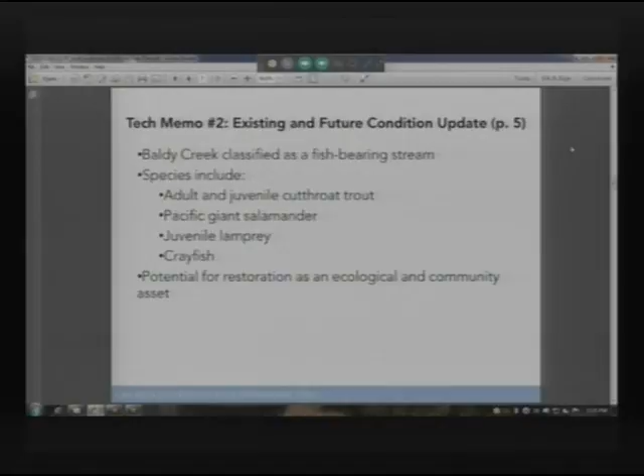Let's click forward to Tech Memo 2. The only change we made based on our conversations early in the fall was to add information about Baldy Creek, which came from a councilor or planning commissioner — folks were really surprised Baldy Creek is such an asset. Lila Bradley helped us with information from the ODOT survey during the 101 construction project. Recapping from the memo, Baldy Creek is classified as a fish-bearing stream by Oregon Department of Fish and Wildlife. Species include adult and juvenile cutthroat trout, Pacific giant salamander, juvenile lamprey, and crayfish. So as surprising as it is for an urban stream right next to the highway, it does seem viable for ecological restoration, so it can be both a community and an ecological asset. That's the one change we made on page 5 of technical memorandum number 2.

Did anyone else see anything in Tech Memo 2? Folks have busy lives, so I'm not sure you poured over it again. We covered it in a previous meeting, but we're supposed to finalize and put those memos to bed as we continue. So any other changes at all?

If not, then I hope — Lawrence, have you been able to join us back? Sometimes the webcam doesn't work just because of connectivity between here and Berlin, but he is on the phone with us.

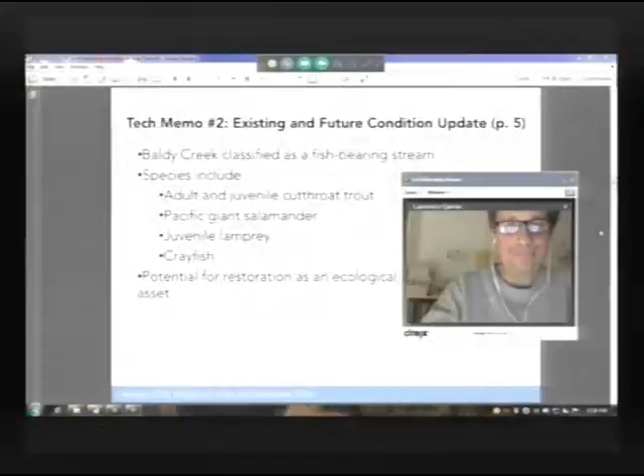Lawrence, at this time, if there are no other questions or comments from PAC members about the purpose of today, I would ask you to dive into a brief overview of the diagrams. So PAC members, any questions before we transition to Lawrence? Or Richard, anything else to add from what you've heard, Deborah, and what you covered?

All right, thanks. I should say thank you to the project management team members of the city, as well as Allison, Lila, and Richard, for commenting on the earlier versions. We've had significant discussions since their comments, and it's really helped us refine some of our thinking about the district. We'll touch on some of that today. I'll turn it over to Lawrence then.

Good afternoon, everyone. I wish I could be there with you in person, but this is a pretty exceptional little piece of technology that allows us to virtually be there. And of course, I've been coming to Lincoln City for many, many years and know it so well that it's fun to be here.

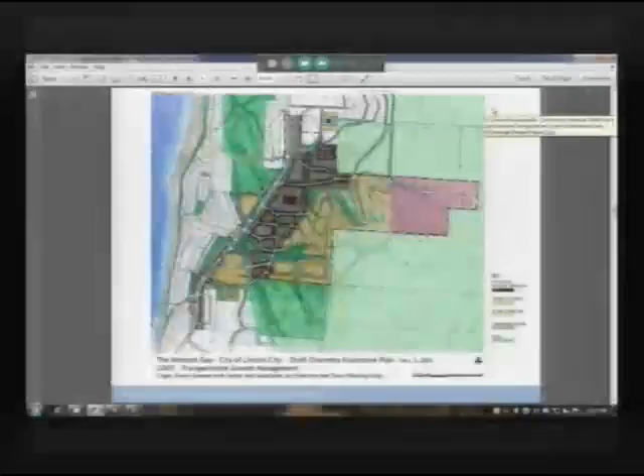I think we'll transition first to the next slide, the master plan. This is the plan we developed during the charrette, as Tricia was saying a couple months back, and it was worked on further afterwards, but for the most part all the concepts and implementation of this plan were established right there in the Nelscott Strip, with people coming in day and night, us working day and night, preparing this plan, walking the site, going up into the hills, up and down the roads, up and down the highway. Sometimes neighbors would come in and say, come on out, we want to show you what our area looks like, and we would tour it with them. So there's a lot of on-the-ground local knowledge filtered into this plan.

Let's start by orienting you all to the plan. Let's first point out, with the arrow, the Nelscott Strip — right down by 32nd Street. The Nelscott Strip is really the heart of this whole neighborhood, one of the pearls, one of the great historic places of all of Lincoln City. And with the recent renovations to the street and realignment of 32nd into a four-way intersection — what we call in town planning terms, Main and Main.

Retailers think of Main and Main as really the center of a village, the center of a town. That realignment really has great potential for strengthening not only circulation in the area, but strengthening the retail on the strip.

Also, the clear definition of the slip lane that was done by ODOT is excellent work at maintaining that little strip of parking in front of their shops. Parking right in front of the front door of a shop, even if it's just one little strip like this, or on-street parking, is the hallmark of what makes a great Main Street.

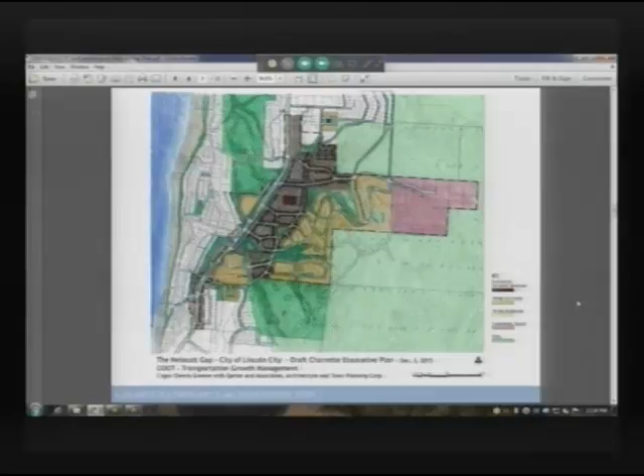I think now we can move to the next map and talk a little bit about the zones. You'll see in this map, before we move on, a couple of different zones we were indicating - but this goes further into that definition of several zones. In fact, on the right-hand side you can see 1, 2, 3, 4, 5 main zones, in addition to open space and parklands.

First of all, let's go back to Nelscott. You'll see that there is a pinkish red color, indicating essentially the existing commercial zoning throughout that Nelscott portion of the study area. You'll also see a similar color to the north of the study area indicating the existing retail, commercial zoning. In between that, you're seeing a red, but with a black cross-hatching.

We do not intend all of that by any means to be a commercial zone. But it is a higher intensity zone, one that would be the types of buildings that are flexible in use, as Deborah was mentioning. Flexible in that they can have some retail in the base of them, but also at the top of them they could be offices or residential. That's called vertical mixed use.

So we're calling it the vertical and horizontal mixed use zone. The idea of mixing uses, instead of segregating retail, commercial areas from separate housing and residential areas, is that it creates a much more lively, engaging community when right down the street or next door you might have a shop, a cafe, a restaurant. So we have to define clearly a more focused, limited area as to where retail would be focused, and perhaps it will gravitate somewhere closer to 32nd Street, especially if that becomes a signalized intersection, as has been indicated by ODOT.

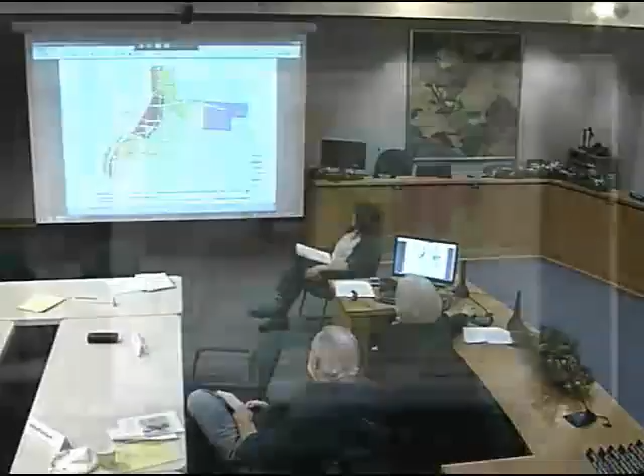Currently, there are several businesses, such as Charter. There is the beginning of a multi-use concrete bike path that has been built there, between Charter and Baldy Creek.

It gave us the vision of something that's seen in many different places, but right there in Nelscott. Very much like the slip lane in Nelscott, there could be a new slip lane built on the east side of the highway, right on the other side of Baldy Creek. It could become what we call the Baldy Creek Boulevard.

It's as if there's a side boulevard lane that is a much slower moving, one-way lane moving north that would also have parallel on-street parking. And that could also enable a variety of different kinds of uses that could be the front door from the highway into these new neighborhoods, or the new neighborhood. So it's a very interesting concept. We'll show some further detail.

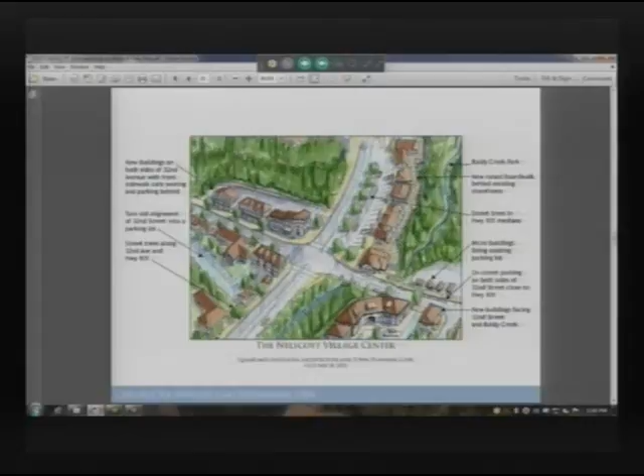You can even see in the left-hand corner of this drawing the old street alignment of 32nd. That can now be turned into a parking lot in the backs of those new buildings, existing and new. Next slide.

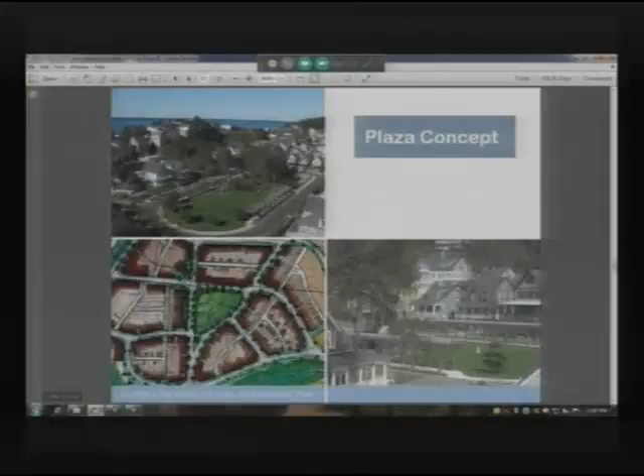Kirsten mentioned, and I mentioned also the little green or plaza. It could be literally a green with lawn in it, much like a couple of photographs we have here of the Olivia Beach Green, or it could be a hardscape plaza. What we're showing here is about an acre in size. It's actually fairly large. It's not meant as a large ball field or a play field. There are fields further south of here in the high school area. So there are opportunities for a large play area. Also, this is a very hilly area. So I'm not so sure that there's a lot of opportunities for large, flat, open fields.

But this becomes an opportunity, sort of an open palette for what kinds of activities could occur here. Also, places some kind of civic building, perhaps a Boys and Girls Club, any number of different kinds of civic buildings can pair very well with this kind of an open space. Next slide.

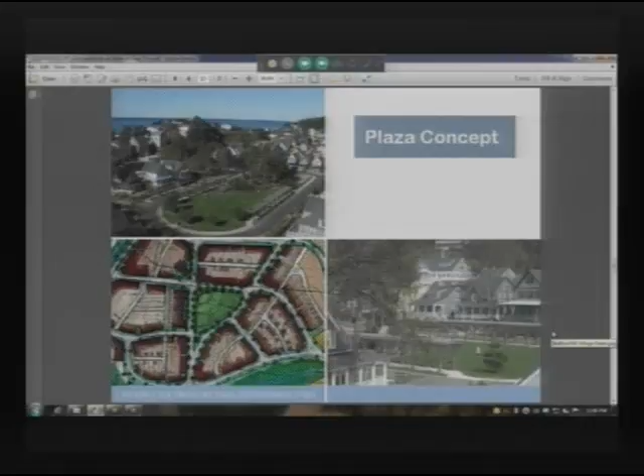The next zone that we spoke about, right along there, again, that red hatched area is vertical and horizontal mixed use. We saw this image already. So we talked about that kind of a mix of different kinds of housing and retail and civic and business. Next slide.

The next layer up the hill, you'll recall in the drawing, was that sort of mustard color we call village community. Again, a kind of mix of, it could be a combination of single-family, row houses, even buildings that look like large houses that might actually have several units in it. Again, we're thinking about workforce housing. This is not about rental units for vacationers. This is really where people that work here in Lincoln City, live here and work in Lincoln City can live.

Next slide. And then the hillside residential. You march up the hill, it becomes a little lower density, a little bit larger lot. Single-family houses primarily, but they can also be duplexes, double houses. So again, getting a sort of a blend of variety, but they're not strictly different zones. They have a continuity. Next slide.

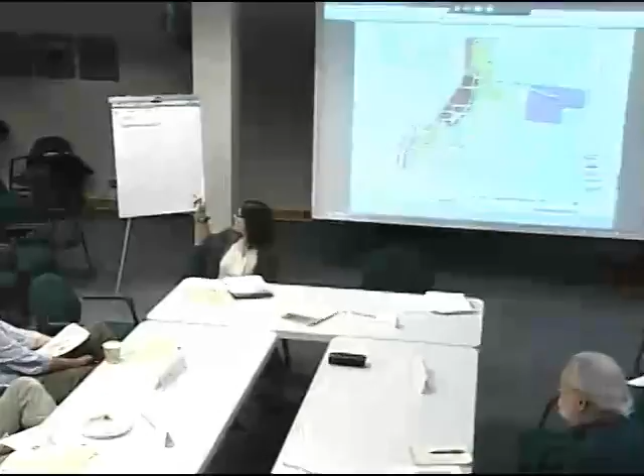Judy Casper, who wasn't able to be here today, sent us good detailed comments on the draft. Thank you, Judy, in absentia. She looks forward to being with us in February. Two of the main ones I put up on the board here I wanted to acknowledge. A few are at a very detailed scale that we may or may not even get to in this planning work. But one, her point has always been to make sure there's enough parking. So she was a little concerned with the micro buildings in one of the lots, with removing any parking and making sure there's adequate parking for the district overall. I want to just let that stay, because there's nothing we'll resolve today, but it's good to remember.

And then the neighborhood connector, she was a little concerned about that functioning as a bypass to existing Nelscott and the commercial businesses there. As I said, and we mean it, we only want to build on the economic vitality of those businesses. So her concern is, if there were the Foothills Boulevard that Lawrence has mentioned, running north-south internally, would people use that as a bypass of 101 and miss Nelscott, the existing Nelscott?

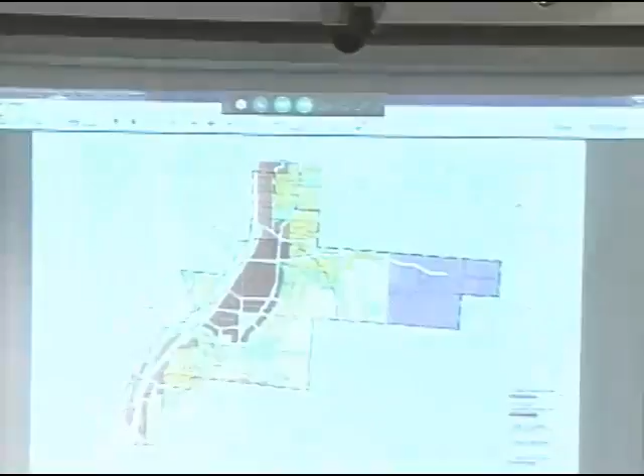So that's a concern. Lawrence, you may want to respond to that one, because I know we've spoken to wanting it to function as Coast does on the west side of 101, which is really more for locals. I certainly didn't know about it as an outsider until I stayed at Olivia Beach. But we want to make sure that we keep the main thing the businesses are on, that we're not missing the highway-oriented commercial in Nelscott by encouraging people to bypass. So Lawrence, I don't know if you have any suggestions about how to keep that.

Yes, definitely, and that's one of the most critical things as we were delving into that idea of this parallel street, that it does not become a high-speed bypass. We know how to design streets to keep drivers moving slowly, and we know how to design them to let them go fast. If this is a two-lane street with tighter lanes than a major arterial, with on-street parking, and no center turn lanes at intersections, so you have to stop if you want to turn left, with street trees and sidewalks, and houses and buildings facing right onto it, that's a street that keeps speeds down. If you start putting in left-hand turn lanes, it allows things to go faster. If you go above three lanes and make it a four-lane road, you really can make a good fast bypass, and that's what we're trying to avoid. So we really advocate keeping it narrow and designed to be slow-moving, so people can filter through without it becoming a speedway instead of a neighborhood street.

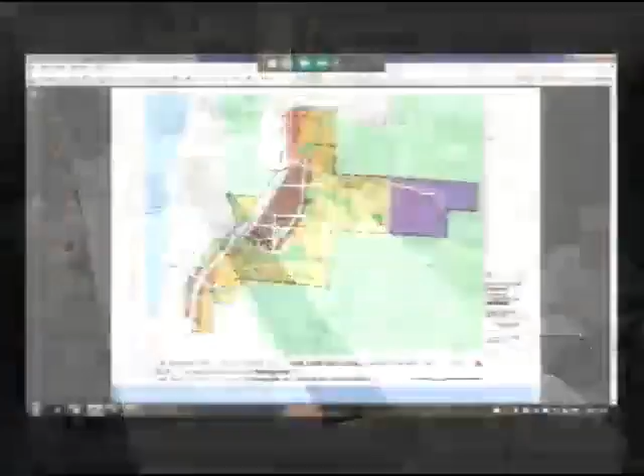One of the things that we'll do from this diagram, and any changes you make, or the PC and Council ask us to make tonight, is we'll extract numbers of units from each of these colors, using a zoning proxy or a range. So what you'd be seeing in that lighter yellow is a lower density or a lower intensity of development. Lawrence has intentionally drawn it so that it's all connected, but really the most access one would have to amenities would be lower down, except for nature. So trying to think of where is community centered around that green space, thinking of the workforce housing assets down there, and also just the safe routes to school as well - we really heard that loud and clear.

So where would people with families be living? The more numbers of them would probably be where it's a little bit lower. And we've been speaking with the developers, that seems to be true as well for some of the parcels - some of the developers either have permits already or plans submitted already, but for some of the mustard areas they're planning to do different forms of housing in there.

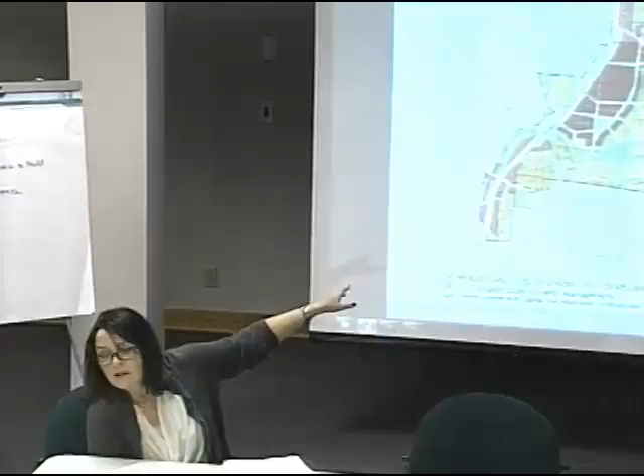So I look forward to getting back into that discussion of what housing types where, and how might the city or the region participate in buying down those costs to keep it affordable. Seems from your direction, and certainly in our second meeting, this was almost the highest priority for this area. So, thanks. Ms. Wright, please.

I just said I was done, but I wanted to say that the other thing that occurs to me when I look at this - and I've been very poor at attending the most recent meetings, and I apologize for that. But we did miss you, but we'll get you.

I really believe in the need for as many and as safe pedestrian crossings of Highway 101 as possible. It seems to me the more we think of residential on the east side, the more we have to recognize that the big blue thing on the west side is going to attract an awful lot of traffic. People who live or are staying on the east side will be attracted to the beach no matter what. If we can keep them out of their cars and have them walking, it might be a more pleasant experience for them and better for the city.

In my dream, we've got the Ocean Lake Arch, we've got the Taft Arch. If there was some possibility to put an overhead walkway over 101 to mimic that arch and brand it Nelscott, I realize that's probably impossible for a lot of reasons, but if the goal was to have families walking across the highway without fear of getting struck, given the visibility concerns we have on a day like today—it always worries me to see Ocean Lake in the summer with so many people running around—I think something like that, though near impossible to build, would pay off in spades.

At 32nd, 23rd, and then the one through Agnes Creek and over. But there's not a lot. To your point, let's make them frequent enough so that they're really safe, but short enough so that people will use them and not choose to try and dash across.

There will be a crosswalk at 29. It's just built, right? Yes. And we've been toying with the idea of, between Bard Road and 23rd Street, the possibility someday of a bridge across there, because there's a pretty direct connection there.

We actually looked preliminarily at engineering—we did this years ago—and the grades are feasible. You'd basically have exit and entrance ramps to the bridge, not a cloverleaf, but just up and then down. It's possible to do it. That would be an automobile bridge. Yeah, automobile and pedestrian.

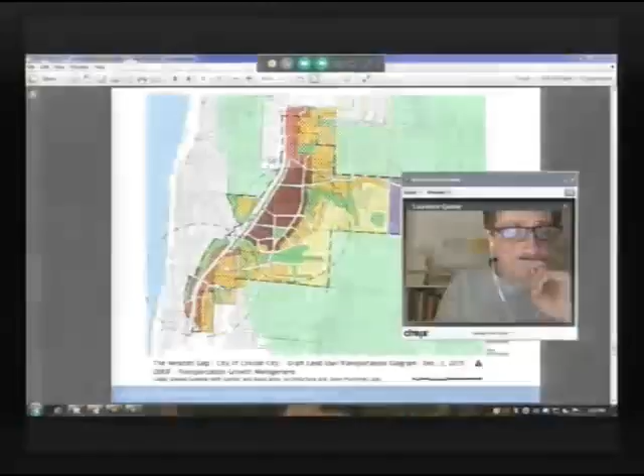You can see on the map how close those could be aligned right there. This is existing Bard, and it goes down to 19. But here's 23rd right across the street, right across the highway.

Good comments. Can I ask, Augustine, do you have any comments? Actually, this was exactly what I was thinking—to get from one spot to the other, you're in a car. That's right. And we were really one side or the other. Yeah, how to cross. Great.

Counselor—oh, sorry, hold on Deb. I was going to ask Nani, particularly because you're involved with the chamber, what do you think about the business, the mixed use, that whole concept?

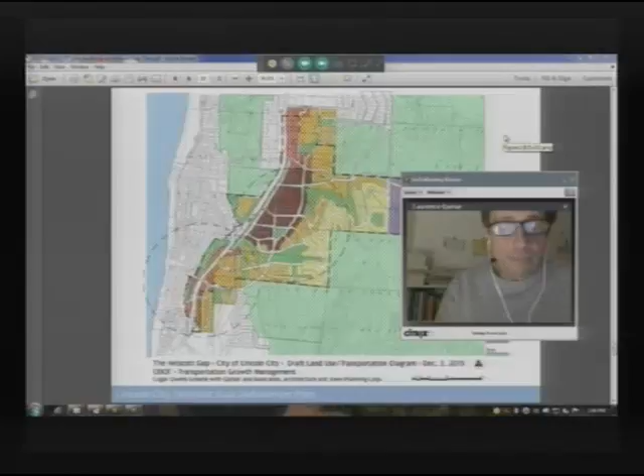I like it very much. Further development of Nelscott—yeah, no, I like it very much. In fact, it's reminiscent of other areas I've been in that are really vibrant, so I really do like that. With the slip off, yeah.

It's a delicate treatment, and we're cautious of it because of the pearl focus, so we're very cautious about that, and cities brought that to our attention as well. There's so much focus on the pearl, so we want to make sure we wouldn't, to quote, drag commercial to sub 101, but really do it thoughtfully and also limit the number.

We don't have that up right now, but we'll possibly limit the number, subject to market, and we won't get definitive in this study. We'll need a citywide market study and look at how much should be localized by zoning to Nelscott. We'll write about that, but probably not conclude definitively.

Lawrence, maybe you could show that with the arrow so he can see what I'm pointing at. We thought about why this area is shown and not crosshatched. The north and south ends of the study area would formalize the commercial enterprise there, possibly some anchor internal to the district, but not necessarily throughout without limit. That's a delicate question of how much to hold back the market and where to put it, with respect to existing zoning. So it's something to look at very carefully. But thanks for your overall feedback.

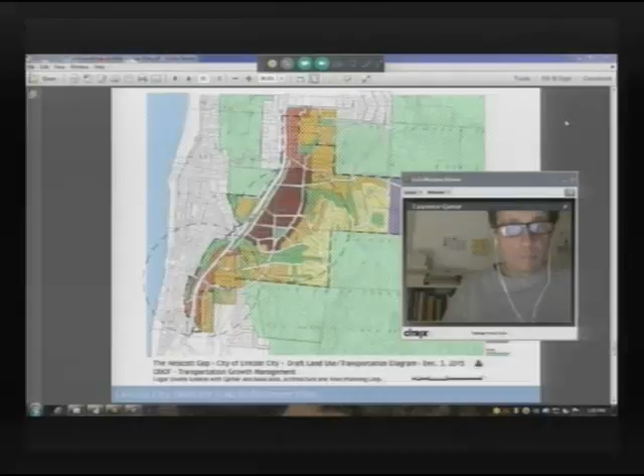One more thing I wanted to mention is we have on the wall a close-up showing how the slip lane might work. It's still in development, but we had Reid associates take a look at it to verify there was enough room to do such a thing. So if you want to go up later and take a look, we can have more conversation.

Now, do you want to? You can show that extra slide on the back if you want to just hop to it for a second. I do not have the power. My finger wasn't doing it, but there you go.

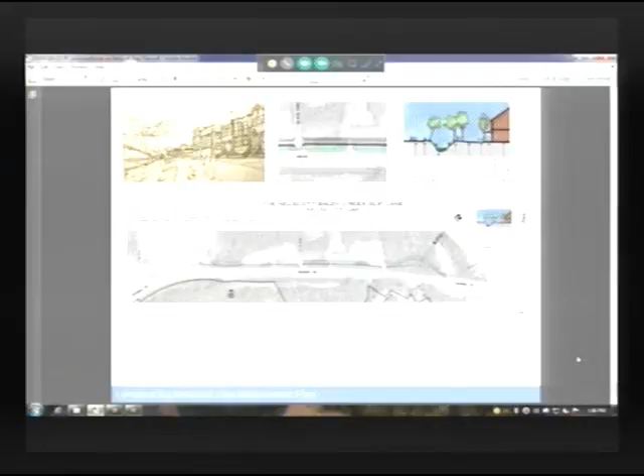So there's an image of the Baldy Creek slip lane. It's too hard to read on the screen, but if you want to go see the big plot that Sandy produced for us on the wall, that's the idea there. We're really trying to look at whether it's feasible, this great idea, and looking carefully at the width there. Probably not for on-street parking in every single block, particularly the southern end, which is constrained. But the concept still holds enough to merit further consideration, if you agree. There are lots of drainage ways on the south end, so we may end up starting it at Charter, for instance, and going up north from there rather than trying to start it lower.

The councilor had a question, then Sandy, please. As an alternative to an overpass for the highway, another option, it seems to me, is a tunnel. Okay, go under. A pedestrian tunnel under. Okay, we'll keep it on the list for sure.

Actually, I was pointing at Chester, but I do have one comment. I came in late. This area borders on the north end of Spyglass Ridge open space, and I don't see any green that connects to Spyglass Ridge to continue trails that might go through that development. That's a perfect way to get people hiking farther north, longer distances. I know it's intended to, Sandy. There is, actually, at the very bottom center. That's a good point, because that is the intent, Sandy, so thank you.

Right here. This is further down here, to the west of that. Yeah, further down to... and then to the west, this one, Richard, right here. Oh, here. Yeah, right in there. So that is the intent, but maybe we can make it a little more clear.

Yeah, there's a diagram that Lawrence produced yesterday - he's very quick with production, generating about five images a day. We might include in the meeting summary an image he made with blue lines going north and south showing all the connections. This PowerPoint has already been posted online at nelscottplan.com, so folks can pour through it. We'll add that image so people can see, because the north-south connections are a major emphasis here for all modes.

And we had talked about this could be a big part of the Head to Bay Trail. That's right, because it would be connecting the trails in Agnes Creek and across at either 23rd, 29th, 27th, and then following the slip lane down or the local capillary streets, and then going further south into Spyglass.

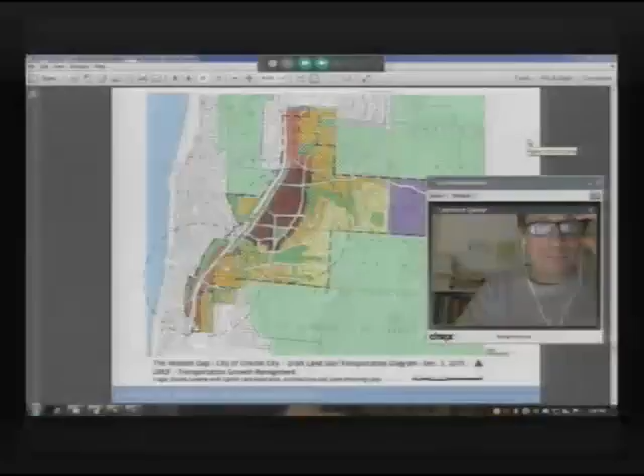And of course, that also is the route to the schools and the community college. I think I pulled that up for showing in a narrative too, because that was a major design element. Ian was in with us from staff, and that's when the team went out and actually walked it to figure out where that crossing would be. It's such a fundamental design concept that it had to be shown connecting the two open space areas.

So good. Okay, Allison, how are you thinking it's looking by now? Good, yeah, good. And if you don't mind, could we skip me? I feel like I've had a lot of work. Sure, no, that's fine. Scotty, please, how are you thinking about it?

Criticisms are okay. I was wondering about some of the trails, particularly up there going to the schools, if it was actually developed. Some of our trails are pretty rugged, to say the least. I was thinking even some paved trails up there. Not every access has to be a street.

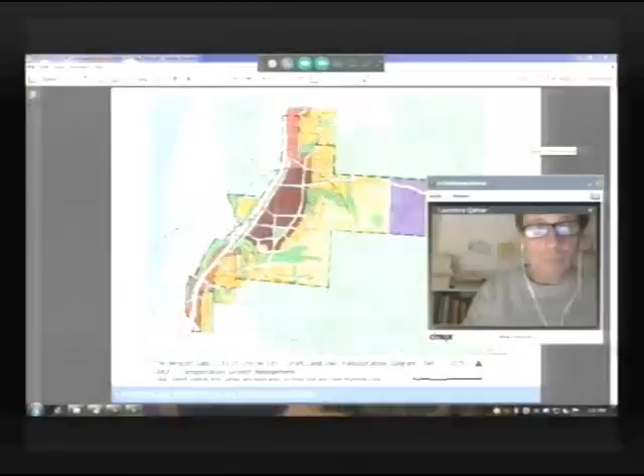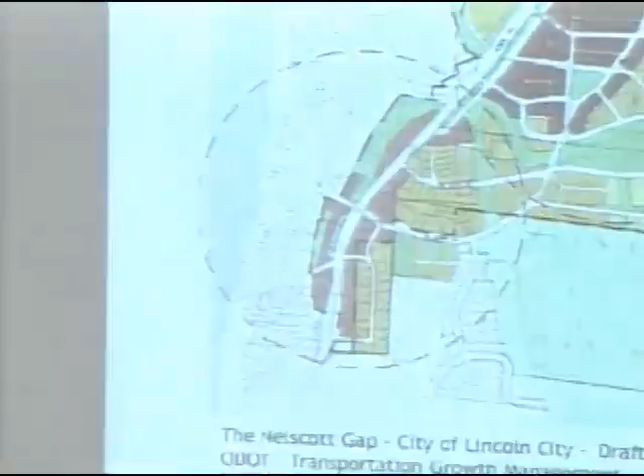It looks like a lot of streets. I mean, I appreciate that. But really, what we see as white lines on the big map are only streets per se. We do compare them to over in the existing Nelscott neighborhood. The streets, they don't stand out as much in that neighborhood, but I think they're similar. And Lawrence, did you use that as sort of, not a scale template, but a scale pattern?

What I'm saying is the volume, the size of the blocks that have streets around them. If you cut them in half, it makes more space to take care of. And I was wondering if we could serve the area with fewer streets, and maybe some more developed path access. I don't know, that's just my thought, because that's a lot, that's quite a few streets.

And then I was misreading this map, this small scale down on the south end. I guess I don't know what street that would be, but some of those lots down there are pretty small. Some of those are existing. I was wondering what they... if that's, well, just north of that, actually, just right in there. Yeah, I think these are existing. What? I think these might be existing. Oh, okay, okay. And on Dune, off Dune.

And that would be residential. Maybe these are platted and not developed. I know one side of Dune, we had visitors, participants from Dune in here, and I just can't recall, maybe these are platted, I don't think that's developed. Right, I think these are just already platted like that.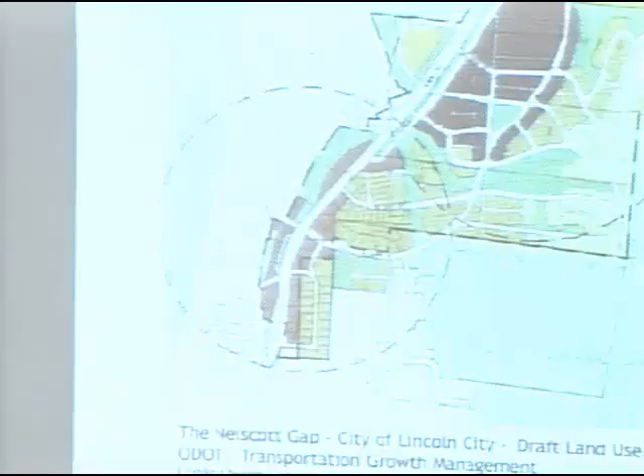So Laurence has picked up the existing map. But good point. So, Laurence, do you have any response to Scotty's observation that perhaps this is a lot of streets in here? Yes, certainly. I think one of the things that ends up maybe making it appear to be a lot of streets is that you're also seeing alleyways.

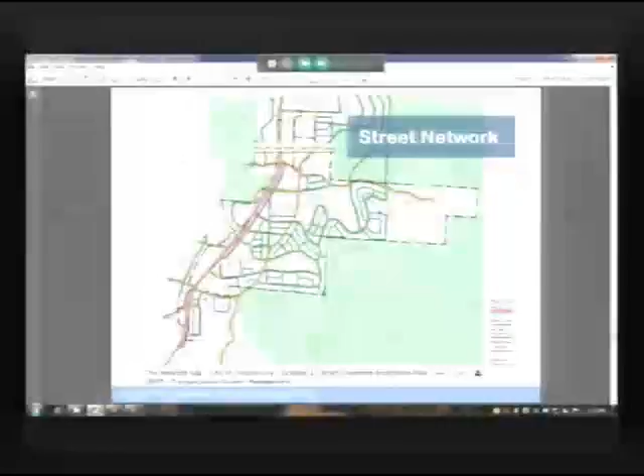So the small streets, that's what I'm thinking, that's what I'm thinking, what you're actually seeing here are 150-foot blocks. So the lots are 100 feet deep. The alleyways are 20-foot rights of way, they're the blue lines. Most of the green lines then are the actual streets.

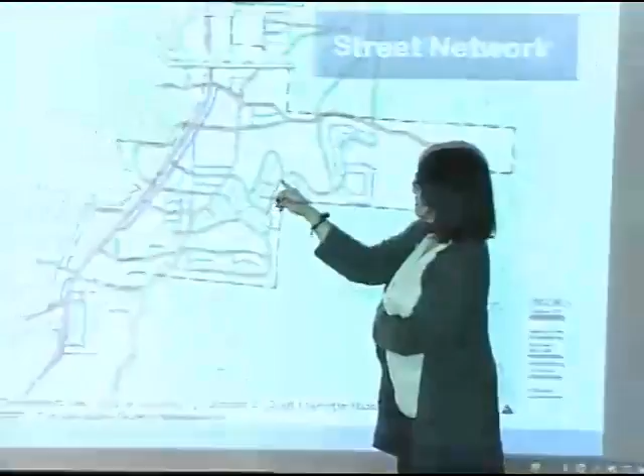You also notice there are no dead-end streets here, no cul-de-sacs. And that's done quite intentionally, so that everything flows out, flows in, in two directions. In terms of them being pedestrian walkable places, don't forget also that every one of these streets will have a sidewalk or path on each side.

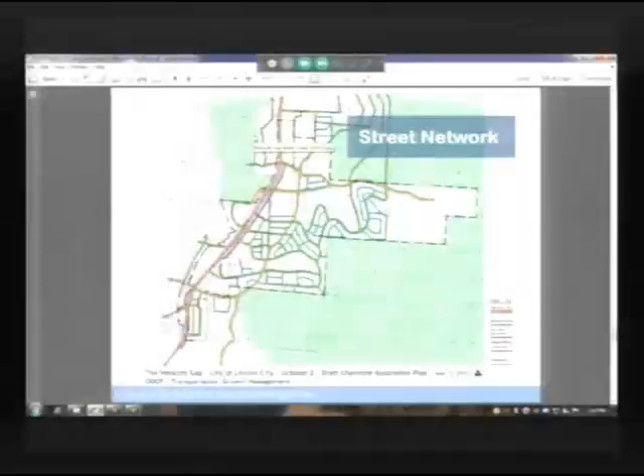And then there's also actually a lot of contour and topography and the drainages that actually precluded the ability to put in certain streets. So some of the blocks actually aren't quite as large where there are those drainages. So where we have the areas that were appearing to be fairly buildable, we figured let's concentrate a street network in those areas so that, again, good density of workforce housing could be established there.

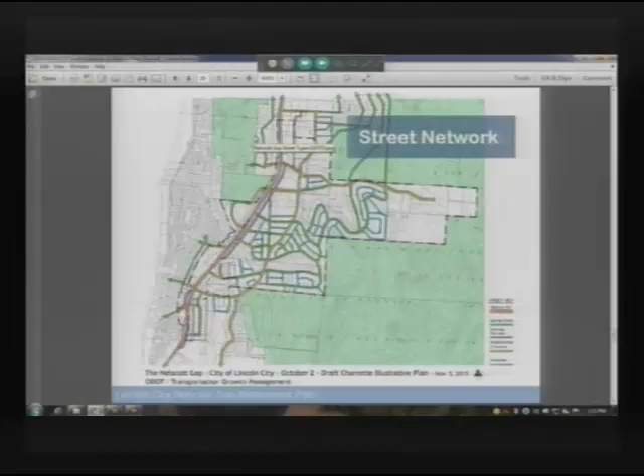That's better there. Yeah, this is just the transportation network. So the blue and the green, you can see not everyone's eyes, they've asked us to make the contrast stronger. We haven't done that yet, but if you can see the differentiation between the blue and the green, you can see what the real streets are as opposed to the alleyways. The alleyways are a good substitute for a lot of paving, I think. Right, and that would be pervious surface, of course, and subject to Lila's standards.

How about Lila? Any observations from you?

Well, I like the concept, and just making sure we don't lose too much commercial area. We're looking at 5, 10, 20-year planning for our capital improvements for water and sewer. I'm looking at some possible concepts because this whole area will need a reservoir, and that can be a big expense when trying to do economic development, roadways and housing. So we're looking at that in the future as well, and it might become part of our comp plan. But we are looking at that because that'll be a definite. Whether you do a 2 million gallon tank or a 4 million gallon tank, that's $2 million or $4 million, so it depends on the needs there. But it might be a really good placement, eliminating maybe another reservoir that will need to be replaced in the future, and having it seismically correct and in a location that wouldn't harm a neighborhood and the drainage from that.

Great, thank you. Good. And I suspect we'll have a detailed conversation with DJ as we head into the cost estimating and financing on this, so please take our calls. We'll be back in touch with you. You always do, and it's been wonderful. So thank you. Okay, great.

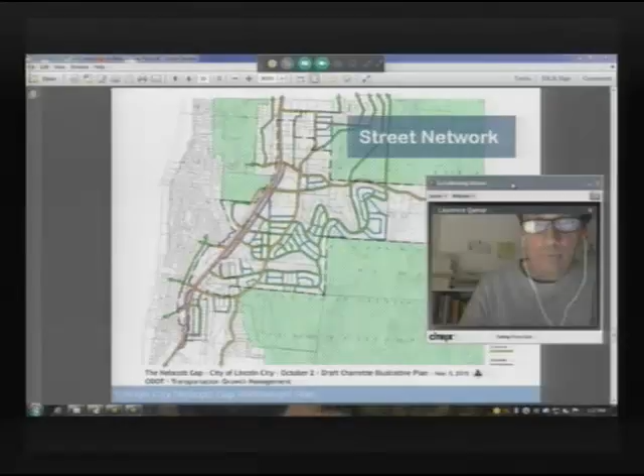I interrupted someone there — was that someone on the phone? Was that Valerie coming in? I thought we had incoming on the phone. No, I don't know, I'm on the line, yes. Okay, thanks. Valerie, do you have any comments, since you and Patrick are both here, I believe — Valerie Grigg Devis with ODOT? You're generally comfortable? You're kind of far away from the microphone. Yeah, would you repeat that, Lila? Just ask her the question. Any comments, Valerie, that you'd like to share? And if not, we'll just move right along. Say it again, I know there's delay on GoToMeeting, so I just have to wait for a moment. Valerie, do you have any comments on the draft plan you'd like to share?

Well, I think it's interesting. I think it's definitely a significant proposal for really changing land uses significantly within the study area.

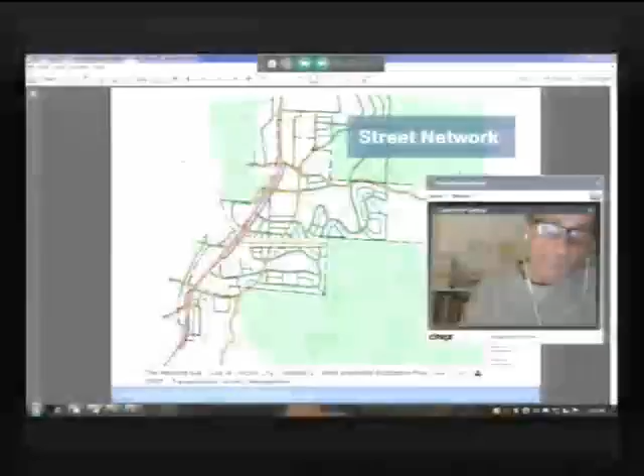One of the things I would note, I think the frontage road concept or the slip lane concept has some advantages. I'm a little surprised by the number of connections to Highway 101, and I wonder if so many of them are necessary, because you're creating cross-traffic conflicts in at least 4 different places. I wonder if it's really necessary — especially the one you have your cursor on right now, the first one starting south — it's not creating any cross-connection that's a benefit. There are several I think should be evaluated a little more, because part of the benefit of having a slip lane like that, getting people away from the main flow and high-speed traffic, is safety. When you start reintroducing connections to the highway, and you have a number of them close together, you're creating potential conflicts and reducing safety, possibly.

So I would suggest, if possible, to try and make it a little more of an exclusive flow on that slip lane — on Foothills Boulevard. Because it would not only preserve the character of it, I think it would probably be safer too. That's a possible consideration. And maybe there's a way to break it into 2 slip lanes in that section.

The other concern I have is whether the topography is realistic. Can you move your cursor up to the first connection south of 23rd? As I recall, and we walked out there together, that was very formidable topography right there across from the park area. I'm having a hard time visualizing both a road and that kind of road configuration blowing through that abutment, that rather large headland on the east side. I just can't picture it somehow.

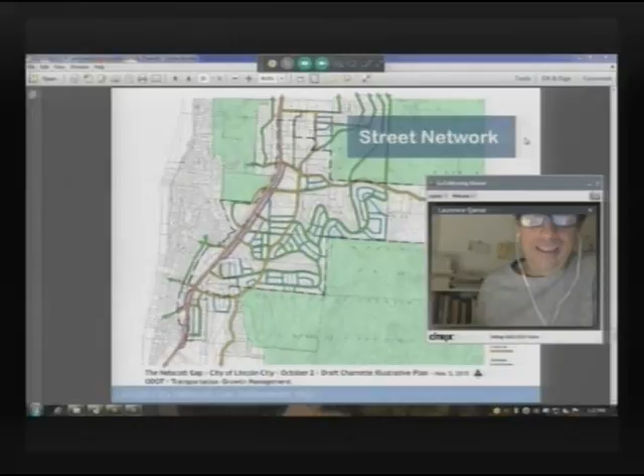Thanks, Valerie. I'm really happy to see off-system connections that are proposed. And what do we call it - the Foothill crest route? The connector is really important. I absolutely agree. You never know when we lose service on 101 for any number of reasons, and giving the community another route is a very, very good goal to have with this plan. So I appreciate that. Thanks, Valerie.

And I'm just... Was that clear? It was. You were crystal clear.

This is Kirsten. I apologize because we have just five more minutes left in the formal meeting, and folks are squeezing this in their workday. So I want to just acknowledge we might start to lose PAC members at 1:30. So before we respond to that, I'd like to hear from both Pam and Don, if we could, before we go. So Pam, do you have any overall observations to share, please?

In particular, I like the Foothills Boulevard concept, and I thought that the connectivity, given the topographic constraints, was done really nicely. I think it gives a lot of opportunity. With the alleyways, the thought that I had in mind, I hope this isn't controversial, but was for accessory dwelling units as part of the housing development, which would help increase the affordable housing stock.

Good, thank you. We can look into that in the implementations. Are they allowed outright right now? Yes. Yeah, good. Okay, so we could just note that in the plan that they would possibly be allowed.

Okay, Don, Mr. Baker, please. How's it looking to you? Thanks, Pam. Well, I really like the vision. I think the vision that's been presented well. It meets the goals we outlined. I think the challenge will be for the engineers to see if this vision could actually come to fruition.

That's excellent. Yeah, so we are getting thunderstorms in the area too, so quite a day. I bet. Well, thank you, everyone, stay warm and dry. Sorry about all the basements throughout Oregon. And Lawrence, thank you for being with us from Berlin, come back soon, we look forward to having you back on U.S. soil. I'll be there early January. Thanks so much, can you stay on the line? Yes, let's call back in 10 minutes. We'll call back in 10 minutes. Thank you, everyone. Thank you so much. Take care.

Thank you, thanks for your comments. Yeah, it's exciting.